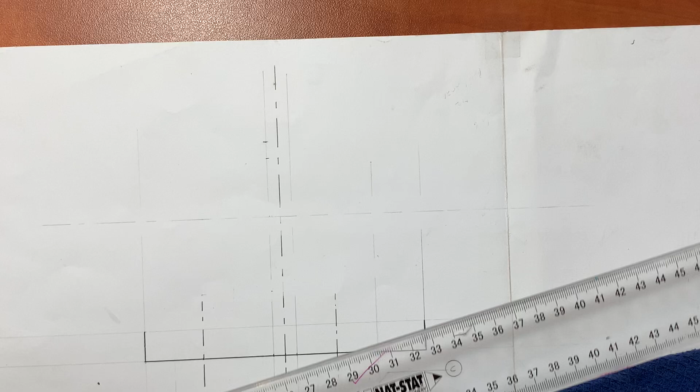Okay, so guys, I think I've double checked. This one is 87. So 87 is ending here. So I'm gonna have a horizontal center line that goes. So this one I'll have to, where is this one?

Okay, I'm actually having challenge with hard copies, but then the owner is insisting, saying please do it. Do it. No, it.

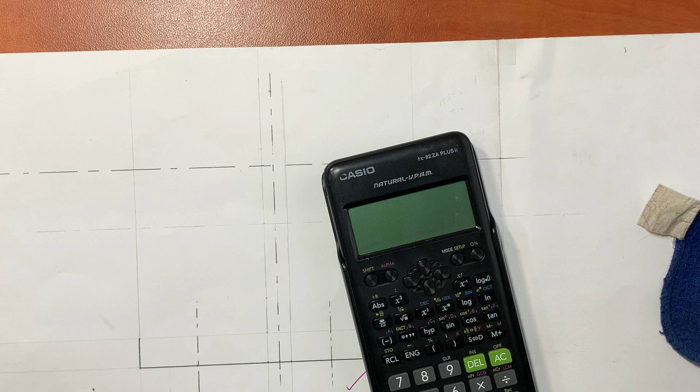Okay, then after that I can come and read the biggest dimension here. So the biggest dimension from here till here is how much? It is 78. We've calculated that. 78 divided by 2 is 39, isn't it? We did that. This is 39. This is it. Then now I just come and place it here, mark there and mark here. And then I can just have horizontal constructional line and another horizontal constructional line.

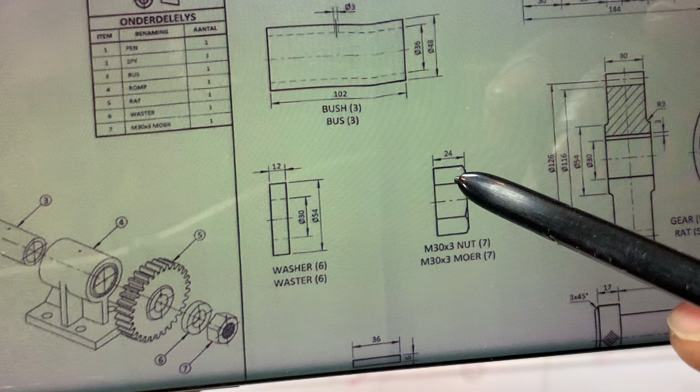Then from there, what can I have now? Okay, I can come and get this one. Let me double check what is going to be fitted there, because we have a diameter 3 there, which is going to correspond with that one. Just this diameter 3 corresponds with that one, isn't it? So what is going to be run there? Diameter, is it diameter? So there will be a pin fitted there. There's supposed to be a pin of diameter 3.

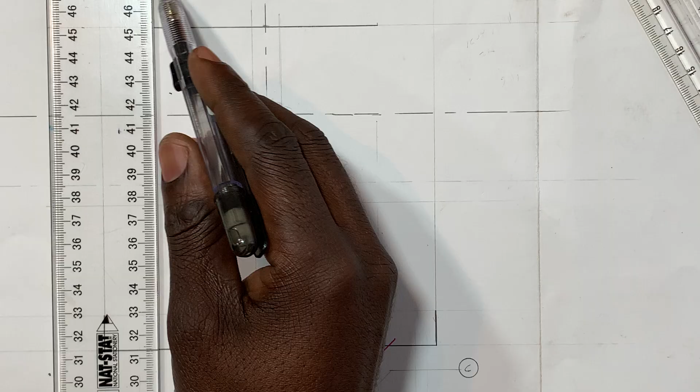Okay, so now what I can do is get this one, 96. So it's 96 divided by 2, which is 48. So I can come and just get the 48 this side. This is 49, 48. Which is 96, 96 to 0. This is it. Can then have a vertical constructional line and another vertical constructional line.

Okay, after that, I can actually see that it's gonna go with 3 millimeter out. 3 millimeter. So 0, 1, 2, 3. Even this side, 3 millimeter. 0, 1, 2, 3. From there, you can just have a constructional line down.

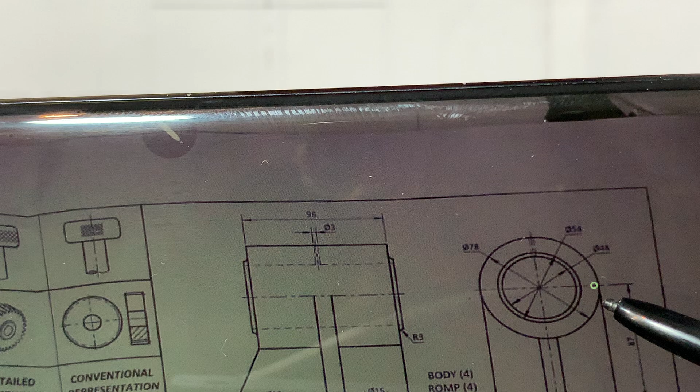Then after that I can come and get this diameter now. This diameter is going to be diameter what? Diameter 58. Yeah, 54. Is it diameter 54? That one is 78. And then the inner one is going to be diameter 48. So this is gonna be 54, which is this one. Check it nicely. 54, which is this one, isn't it? So 54 divided by 2 is 27.

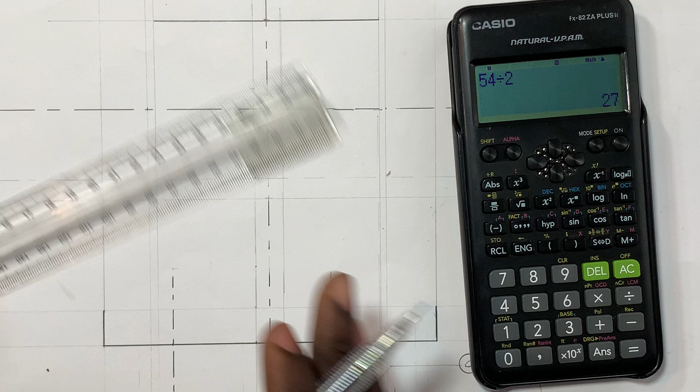So I can come and get the 27 both sides. 25, 26, 27, which is this one. 25, 26, 27, isn't it? Then I mark it 0 and mark it 54. This is 55, there is 54, isn't it? Then have a horizontal constructional line, and this horizontal constructional line will be like this. From here to right there, even this side.

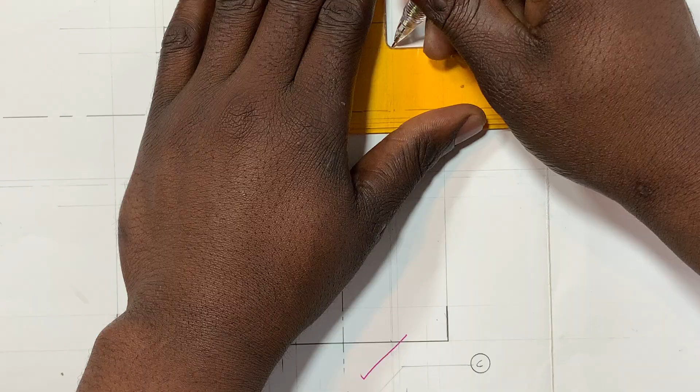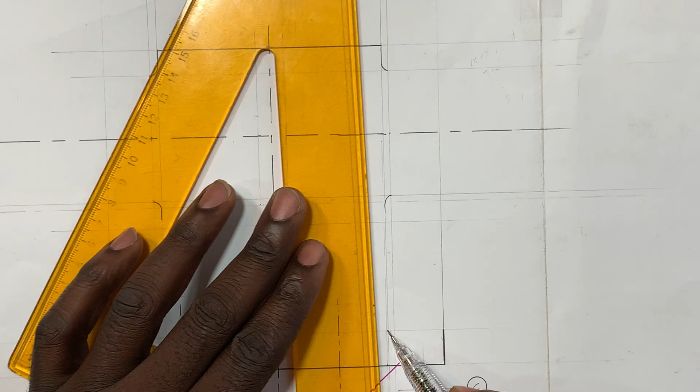From here to right there. Which is this one. Radius 3, which is something very small. So this side, from here till there, do the same thing. This side, this side. Okay, that's same. And then after I've done that, it's gonna go down till where? Till right here. Solid to right here. So solid to right there. Yeah, just a little bit for now.

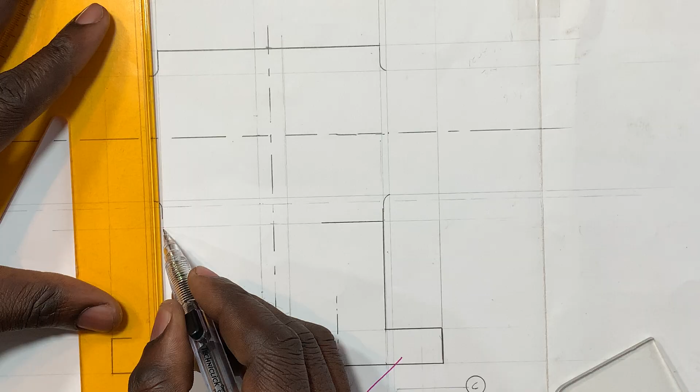So once it gets to the bigger diameter, which is the bigger diameter from here till right there, it is going to be just the horizontal. Repeat like this, and then from here it's gonna come down. So it's gonna just go down a bit, then from here to right there. Okay, that's same. Then it's going to be dark till the supporter, because from here till here is going to disappear.

You understand? So from here till the supporter, so that I can have this one solid. From here to there, here to there. You understand? So till such an extent, we are done with item 4, the body. So let's fit item 3 into item 4.

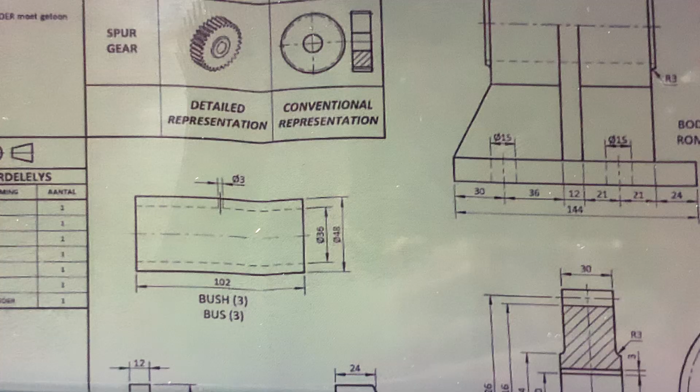So you look at the outside diameter. The outside diameter is diameter 48. So if I'm saying outside from here till here is 48, isn't it? So this 48 corresponds with this one, diameter 48, isn't it? So if you say 48 divided by 2, you are getting 24. So let's do it. 24. This is 25, I'm looking for 24. This is 24. I mark at 0 and mark at 48. This is 50, 49, 48 right here.

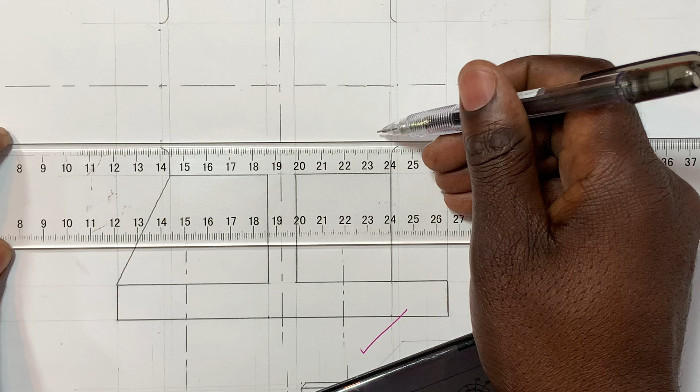And this one is going to be drawn firstly faint, and then from here till here solid. Then this one, draw it faint for now. You understand? So that you come and take a closer look to say what is going to happen there. There will be that hole of 3 millimeter, isn't it? So if you say 3 divided by 2, 1.5, 1.5, isn't it?

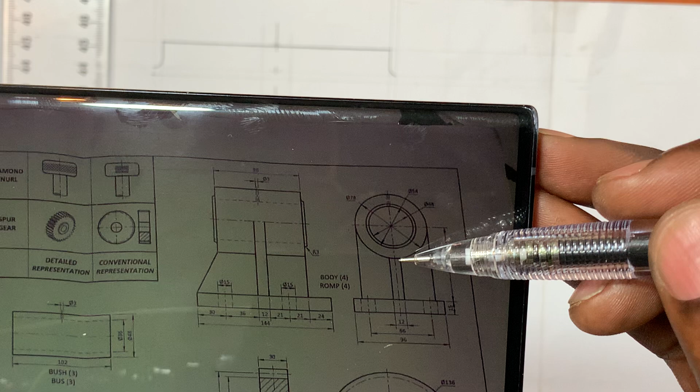So let's do it. 3 millimeter divided by 2. So 0, 1.5. So the 1.5 is between 2 and 0. Isn't it? So this is 4, this is 5, this is 4, this is 3. I mark at 3 and then I mark at 0. You understand? So then if we cut here, you can actually see that hole of diameter 3 is going to be cut as well, isn't it? So that is why what you see on your front view is going to be exposed.

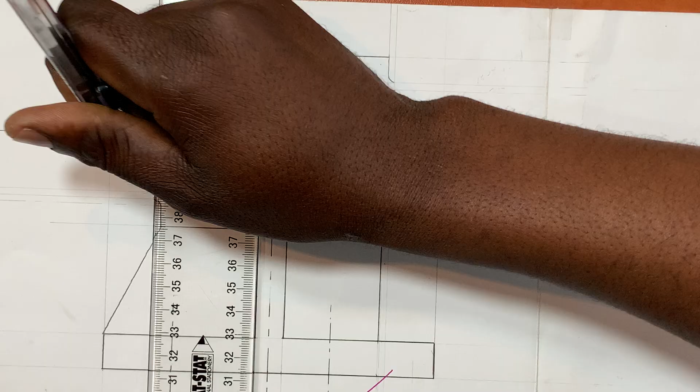So the hidden, those hidden, they will be dark. This one, they will be dark. Okay, so I've drawn this one solid, which means I can also draw this one dark like this, and these ones dark as well, from here till right there, from here till right there, solid. So I can just come and have this one dark here, and even here, dark.

Okay, so this is an internal part of my item 4, but I assume that the outer part of my item 3 is already fitted there. You understand? Which is diameter 48. So now the internal diameter of this bush is 36. Is it 36 or 35? It's 35 for sure. Let me correspond it with another one. 35. So what will be running through the bush is item 1, isn't it? So the outside diameter of item 1 is what? Is 36.

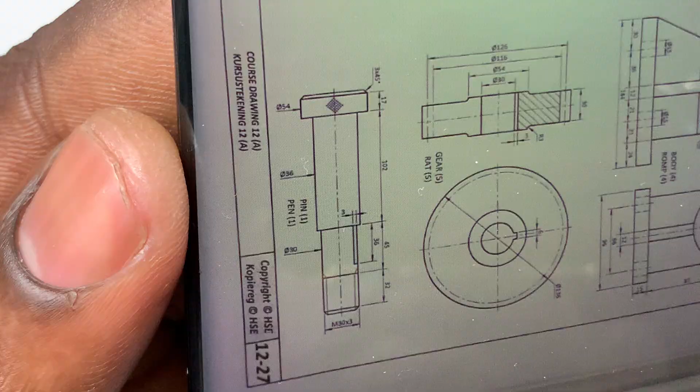And that one is what? This one is what? That is why I prefer hard copy. This one is 30. Diameter 30. So that one is 36. You can actually see it's diameter 36. So what will be running through the bush? This, isn't it? So it's 36. That confirms that this internal diameter that we're talking about is supposed to be 36. So 36 divided by 2 is 18 millimeter.

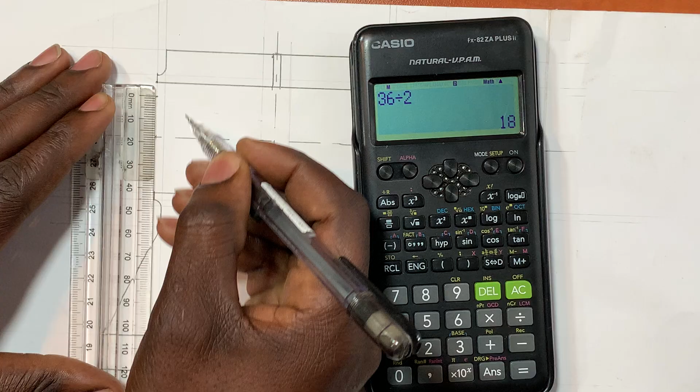18 millimeter. This is 19. This is 18. So I mark 18 and mark it 36, which is this one. Understand? So I can just have dark here and have dark right there. You understand? Then remember, the exploded isometric is always by your side. It's the one that is guiding you.

Okay. So we fitted that one. Which means this left part of it, we can close it. How? Can close right here. And close it right there. Okay, let me double check again before we close, because I can see this bush is actually of a different length. You can actually see that here. We have to erase it.

Let's double check. So from here till here is what, 90? No, wait, let me see this one. From here till here is 96 millimeter, and the bush is 102 millimeter. So you can actually see it's going to overlap just a little bit. So how? If you say 102 divided by 2, it's 51. So it's going to be 51 this side, 51 this other side.

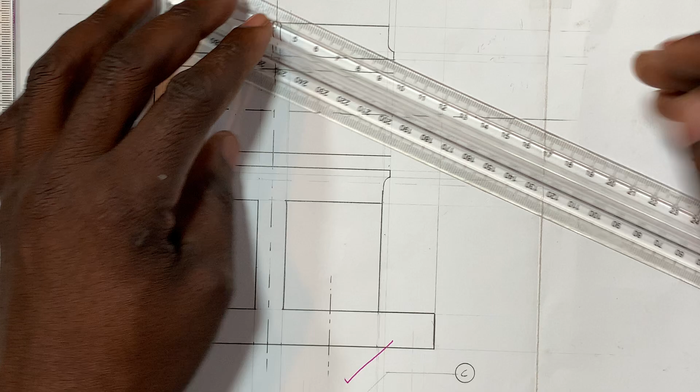Okay, so let's do it. 51. So this is 51. 100, 102. So it's actually correct. So we are on the right track. Which means I can close here as well, just a little bit, from here till there, from here till there.

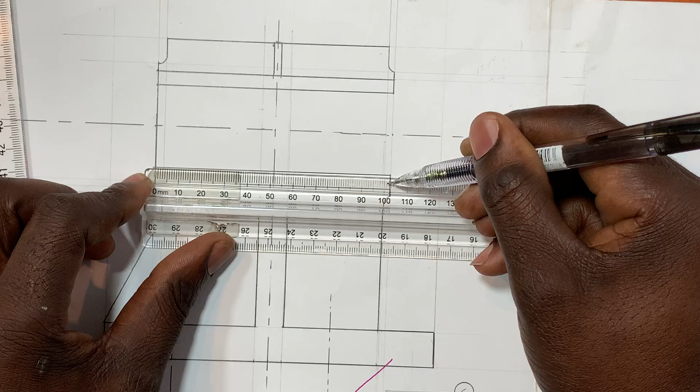106. No. 102. This is 110. This is 15. Let me double check again. This is 100 and 102. Yeah, it's correct. So it's going to be like this. So my item 4 is fitted already, which is this one. My item 3 fitted into item 4 already, which is that one, isn't it? Okay, but then here I have to erase from here, I just erase it.

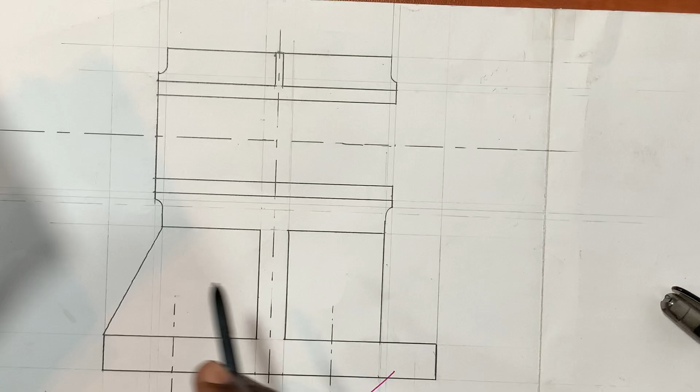Let me erase it now before I forget. Erase it here, my guy. Only here. Only. Okay. Then from there, we can fit what now? We fitted item 3. There is our item 4, fitted item 3 inside, fit item 1 inside already. So the moment I draw the head of it here, it means I'm fitting my item 1 already.

So this is it. The outside diameter of it is what? Is diameter 54. So 54 divided by 2, 27. Open my drawing compass to 27. Even if I don't use the drawing compass, because this is not a hexagon, it's just straight. Okay, so that's 27. It's going to be 27 this side, 27 this other side. 25, 26, 27.

This is it. I mark here, and 54. It's like we've dealt with this dimension, which is this one. I mark there. We've dealt with this dimension before. Okay, they said this is its diameter, isn't it? So it's of a height of what? Of 27 millimeter. I mean, not 27, 17 millimeter.

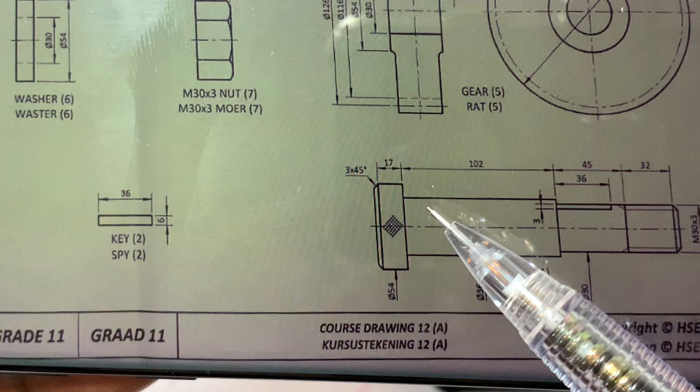My mind is tired. No? I had a long day.

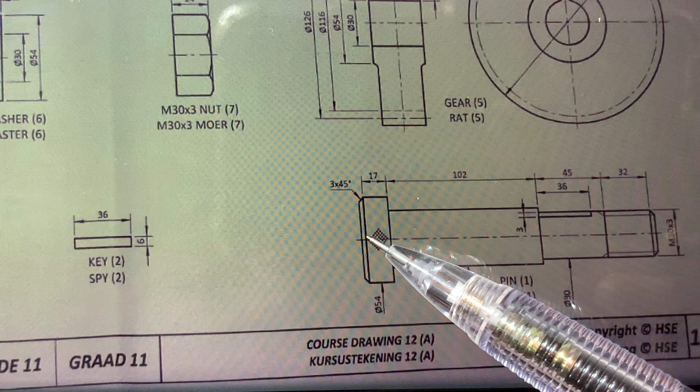Then they said if they are saying 3 times 45 degrees, which means from where your 17 ends to come here is 3 millimeter, and you can actually see it's just coming out by itself. Let me see. 0, 1, 2, 3. Just a little bit, very close. And remember, which line was this one? It's actually that one from the base. You understand? Then from there, it's very close.

Then from there, use 45 degrees. 45 degrees from here to that line. Then from here to that line. Then I can have this one solid till right there. So this is its head. Then after the head, we are going to have its length.

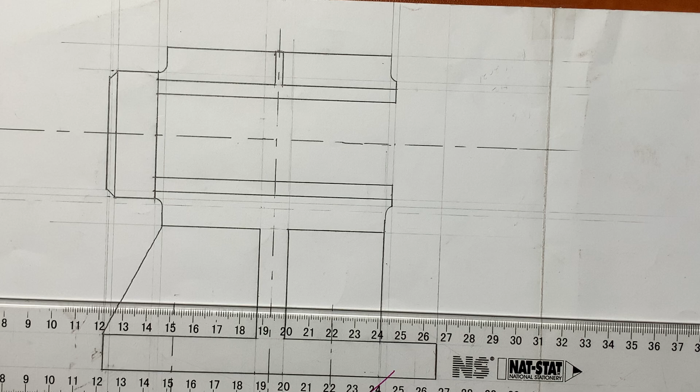The length, we are told again, my brother, that where you recorded 17, record 102 millimeter. This 102 millimeter actually corresponds with what? With this one. And remember that from here till here is that 102. So which means the moment I'm closing it like this, from here to right there, it's as good as if I am drawing this line that you can see from here till here.

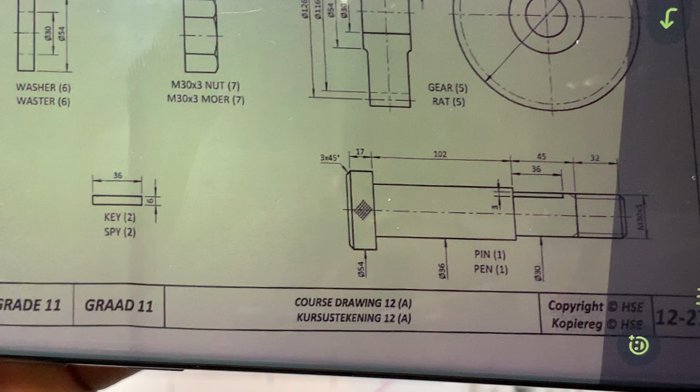Everyone, remember that this is going to be regarded as a shaft, and a shaft, we do not section a shaft, you draw it exactly the way as it is. Understand? And then after that you record 45 and 32 and 36. Let's start with the 45 followed by the 32. 45 from where your 102 ends, which is right here. 45 is ending right here.

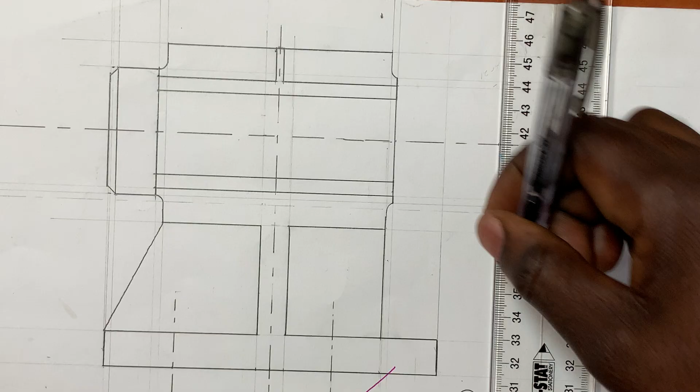Then remember, the exploded view is still by your side. It's the one that is telling you everything. After the 45, there is what? There is a 32 going horizontal. 32, which is right there. Okay, that's it. Then from there I can just have a construction line, another one vertical. Let me simply extend this center line. There it goes.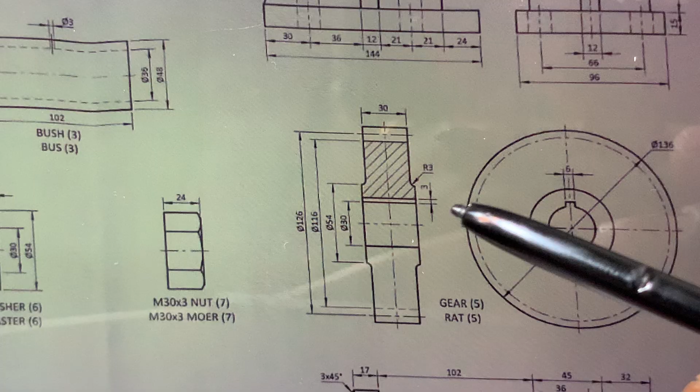Then after that, your exploded view will always be by your side. You can actually see that what is supposed to follow now is item 5. Where is your item 5? Item 5, which is the gear of a thickness of 30 millimeter. And remember, from here till here is 3 millimeter, so even this side from here till here is 3 millimeter. You understand? So it's supposed to be attached to your item 4. So I can fit it like this.

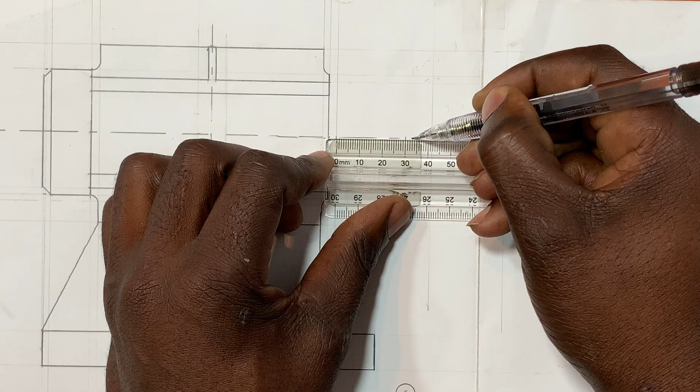Firstly with radius 3 from here till here, 0, 1, 2, 3, isn't it? Once it gets there, I can then record the 30. Which one was this? Let me erase it before it confuses me. I don't need it to be this long anymore. Okay, let's say my 3 is ending there. I can then record the thickness of it, which is 30 millimeter, isn't it? So the 30 is right here. After the 30, 1, 2, 3. Then from there it goes faint like this, then faint like that.

Okay, remember this one was the 45, isn't it? So our wheel is supposed to start from here till here. Let's get to the outside diameter. The outside diameter of it is 126, and remember we are using a scale of 1:1. 126 divided by 2 is 63. So I come in and record 63 this side and 63 this other side. 63, and 61, 2, 3, which is this one.

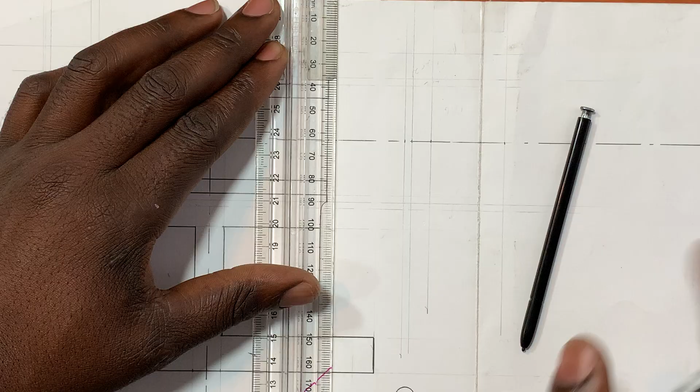Then 100 and this bottom part 126, 120, this 125, 126 is right here. Okay, that's right. And then from there, my 126 ending here on the upper part seems to be going out of my drawing sheet, but I've tried to adjust it. Remember, at the bottom of the drawing sheet I have another drawing, isn't it? So that is why it seems to be getting a little bit small.

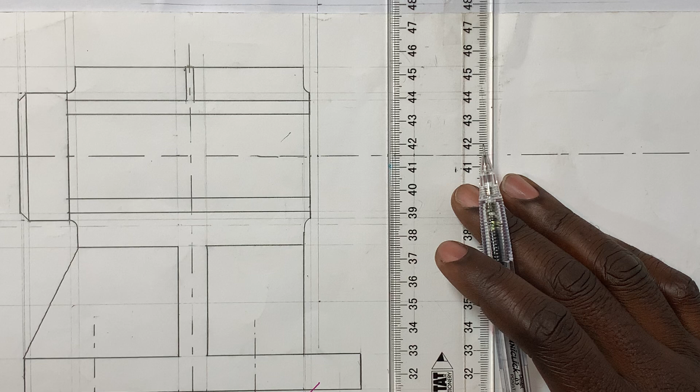Okay, so now after that I can have this one dark. It's where faint going up. That's where my 30 is ending, isn't it? So come and have this one dark from here till there, and from here till right there. So it's gonna go up, dark, just a little bit for now, since I don't know it's going to be dark till where. So even this side, it's going to come down just a little bit for now, since I don't know yet, up until I come and double check this diameter.

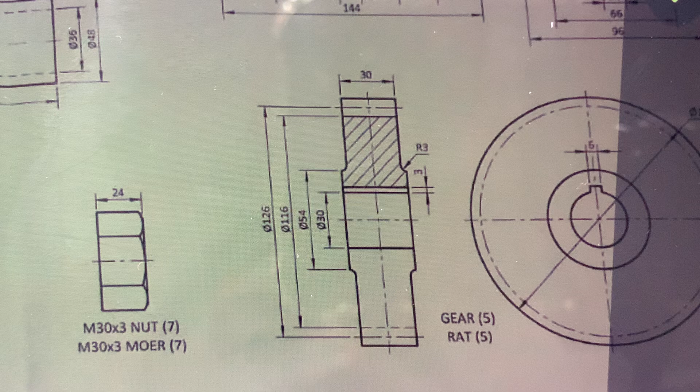Okay, so the 106, let me double check something. The diameter of 126 is actually giving us the PCD. The biggest one is 136. That is why I prefer to use a hard copy. But it's fine, still on the same thing. So we'll fix it.

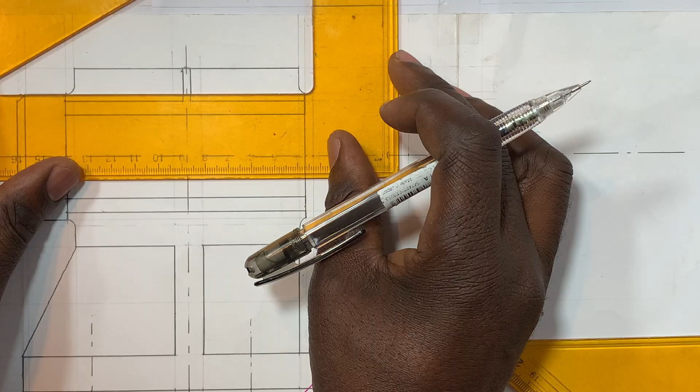Now let's get that one, which is 54. And the 54, I think we've correlated it, is this one from here till here. We've done it, so we know what it is going to be. This is the 54, if you still remember very well. So it's going to be dark till right there. So even from here till here is the 54, and it's going to be done like this. So what you've done this side, you can do it this side as well.

So I'm aligning this with that. So there it goes. Just a little bit. It's not clear. Just like this. What's happening? Oh, the paper that I've put under. So even this side. Where is it? There it goes, which is this one.

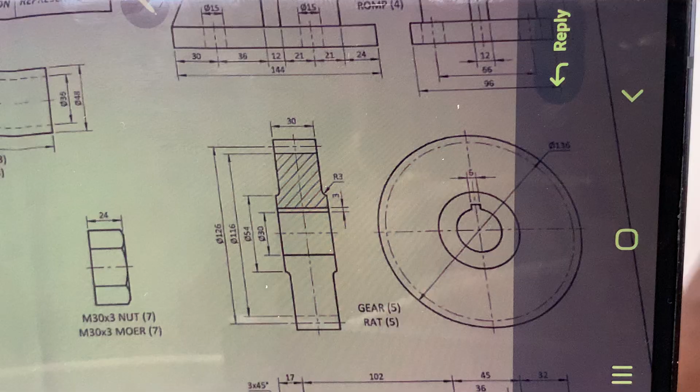Okay, so what I've drawn as a solid here is going to be hidden. It's giving you the PCD, pitch circle diameter. So this 126 is giving us the PCD 126. So the biggest is 136. I can actually see the 136.

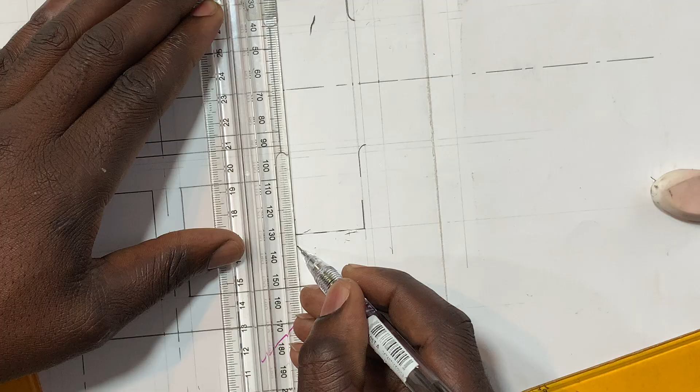So 136 divided by 2 is 68. 68, this is 70, 69, 68 is this one. This is my 68. I mark it 0, and mark it 136. I'm looking for 136, which is this one. So it's the one that is supposed to be dark, with that thickness of 30 millimeter.

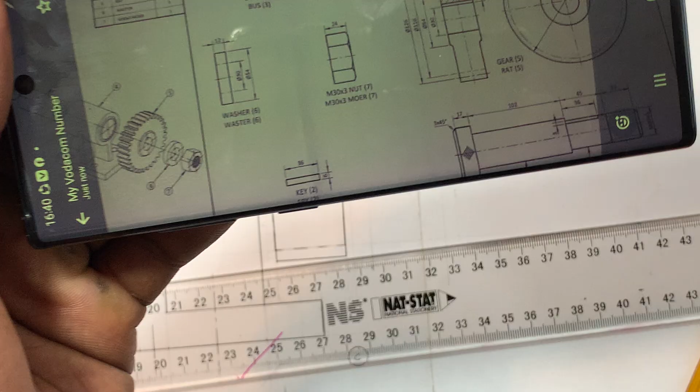So now I'm having a clear picture that from here till here it should be closed like this. So even here it should be closed like this. Are we together? So what you did here, you'll do it up here again. The thickness of 30 is this one, from here till right there. Then now I can join it solid till at that. Okay, that's it. So I can just go down a little bit for now, up until I come and double check what is happening here. Let's see the internal part of it.

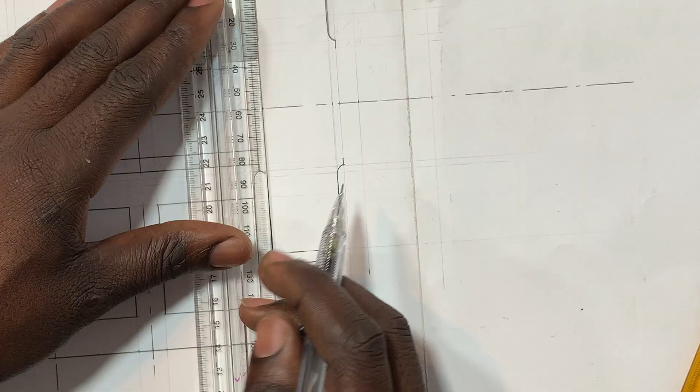Okay, so now let's correlate that 116. 116 divided by 2 is 58. So 58 this side and 58 this other side. 58, this is 60, 59, 58, you are here. So I simply mark it 0 and mark it 110, 115, 116, you are here. And it's going to be solid.

And double check, we are given the hint. This is the half sectional with the upper part in sectioning, according to sectional drawing. So the question said draw a full section, which means even the bottom part is supposed to be the same as this one. We're given it as half sectional, then I have to draw it full. Okay, that's it.

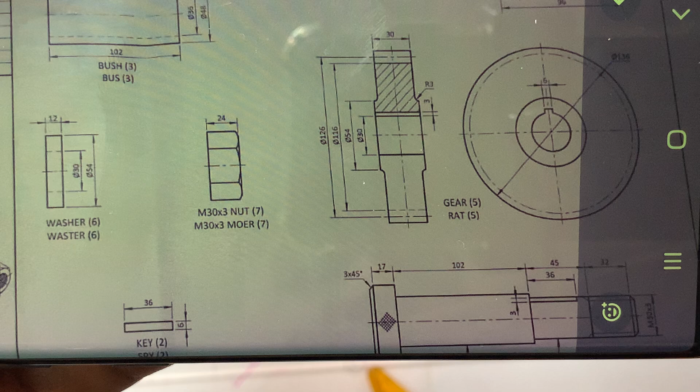Let's get to the 30. Simply mark 15 this side and 15 this other side. So 0 and 30. And I'm gonna have it dark from here till there. This one, let me not have it dark for now, because there is a key that's supposed to be fitted there. The key, which is item number 2, and let's double check. Where is it?

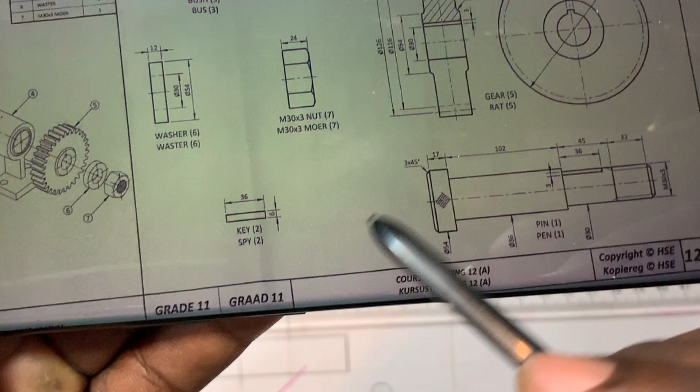36. So from here till here is 36, which corresponds with that one from here till here. Understand? So let me double check now. Let me firstly get this diameter 30, which is this one. Okay, we've gotten it. Then they said from here till here 3, which means from here 3 up and 3 down, so that we get the true 6 millimeter, isn't it?

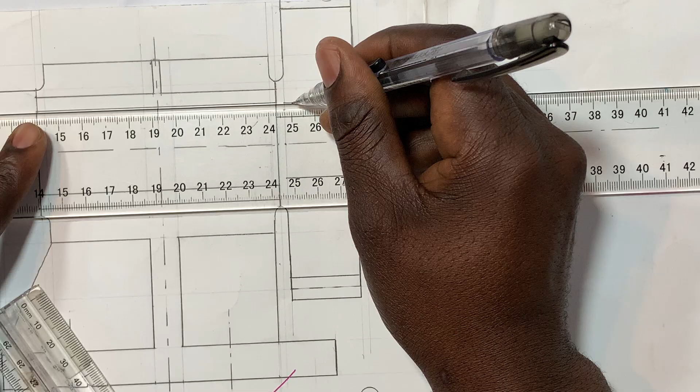So that's the key. Remember that from here till here 15, from here till here 15, so that from here till here is diameter 30. But then 0, 1, 2, 3, isn't it? Then I mark at 0 and I mark at 6. You understand? And this key of ours is going to be exposed as well, like this. I'm not quite sure about its height. Let's get it, because it's supposed to start exactly here.

Remember this part, you see where I'm pointing? This part where I'm pointing is which one? Is that one in our drawings? That one. So the 36 is starting exactly there. So let's get that 36. From here, 35, 36, which is actually exactly right there, my brother. So we were actually on the right track.

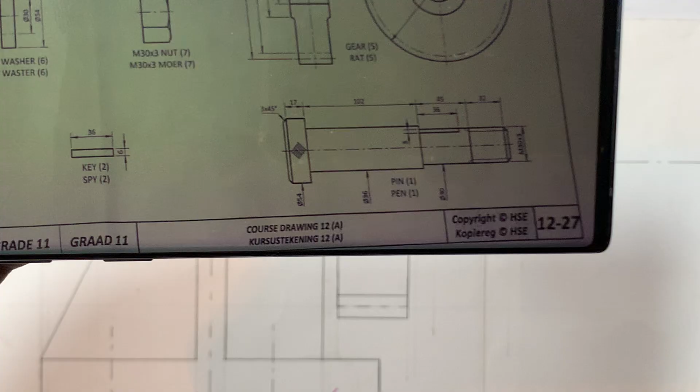Okay. But now what I can do, I'm gonna close it here and close it right here all together. So this one I have to just extend it a little bit till it gets here. Then after that, what is going to happen now? Double check that the 45 is actually ending here. Still remember, it's actually ending here, isn't it? Okay, so after the 45 there is a 32. Okay, we've dealt with it. There it is.

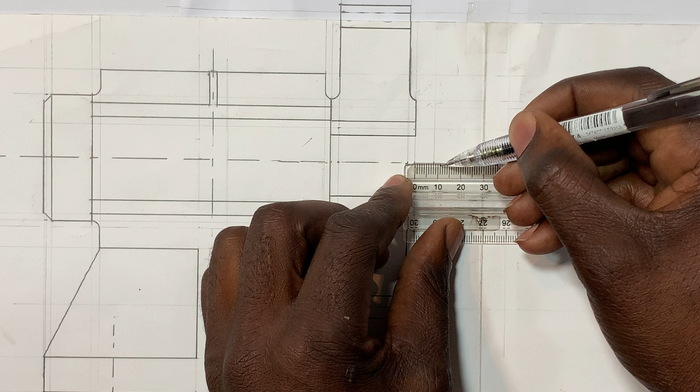Once we fitted the gear, which is item number 5, what's going to follow is the washer. So the washer is of a thickness of 12 millimeter. So it's still the inside diameter, which is that one. Okay, and then this washer, I am going to record the 12 millimeter now from here till right here. That's the thickness of the washer, isn't it?

So there it is. Then this one will be still continuing till right there. Then we come and say from here till here is the 12 millimeter. That's the thickness of that washer. I've never seen a washer with such a thickness. Okay, but that is it. That is its outside diameter. So the outside diameter is the 54, and the 54 is the dimension that we've been dealing with from here till here. So it will be just continuing from here to right there.

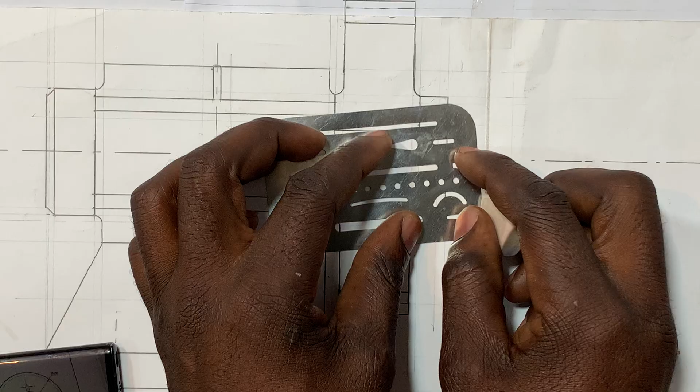Everyone, that's its thickness from here to there. But from here till here, it's not supposed to be. You raise it. Why are you spoiling your way? This one, you don't have to further extend it to such an extent, my brother. Just a little bit. Okay, let's say we fitted the washer.

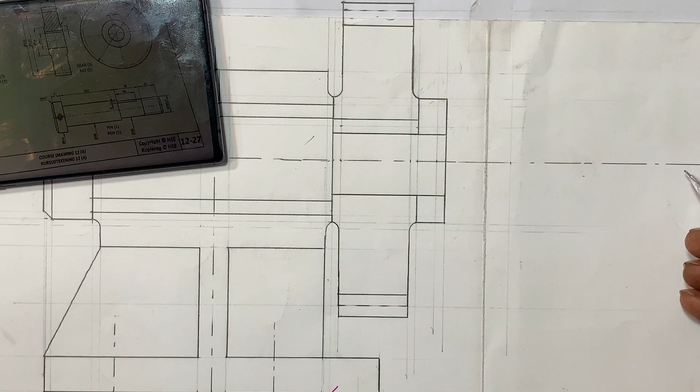Then after the washer, what is going to follow now? What's fitted there is the nut. Going to follow it with the nut now, which is going to be our very last item. So when it's like this, I can close here now. Close, yeah, right here. Okay, that's it. We will have to draw the auxiliary of this. And remember the question said we have to show the 3 faces, isn't it?

So now this nut of ours, to quickly draw the nut. So the nut is M30. Okay, we're gonna say 1.5 times 30, which is 45. 45 divided by 2 is 22.5, isn't it? So I simply open my drawing compass to 22.5. 22.5 is between 22 and 23, isn't it?

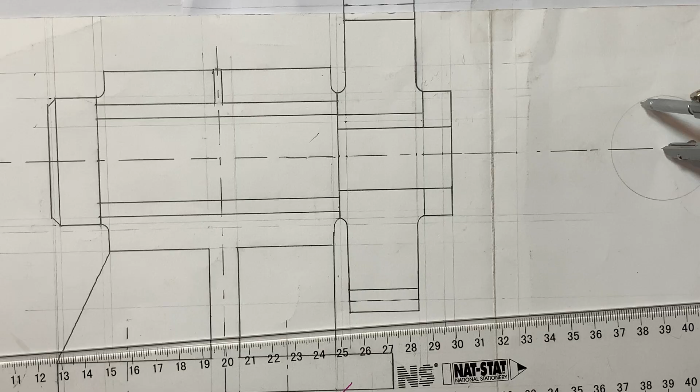Then just place it here. Then there it goes. Faint. Then after that, you can just draw the vertical center line, isn't it? Okay, it's okay now. Then from there I'll pretend as if I'm drawing across the flat hexagon. Use the vertical center line, place it here, strike an arc here, strike an arc here, place it here, strike an arc here, strike an arc there. I'm trying to be fast. Then from there, they said it's supposed to show 3 faces. There it goes.

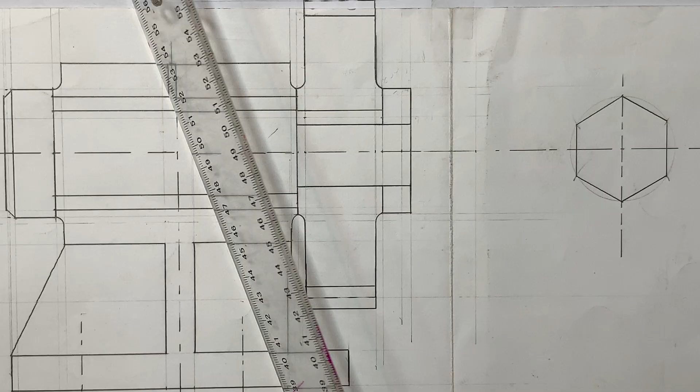There it goes. There you go. And from there, can just take it horizontally. There it goes. Stop there by the center washer. There it goes.

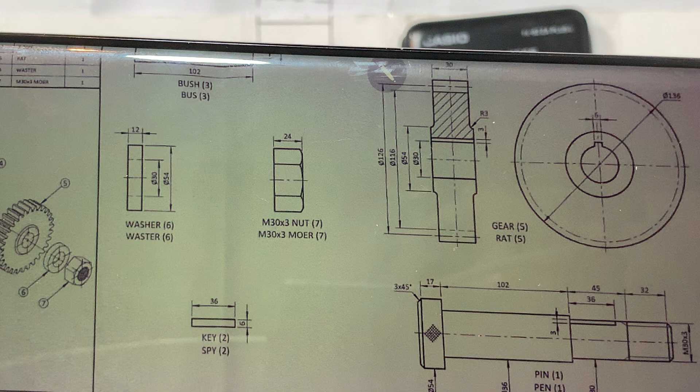So I come and double check the height of it. The height of it was given. So the height of it is 24, but we know that from the standard formula, the height of the nut is 0.8. So should you not be given the height of it, you must then say 0.8 times the M number, which is the height of the nut. In this case, the M number is 30, so 0.8 times 30. So you can see that should you still use the formula, you still get 24 millimeters. Understand? So that's how you use the formulas.

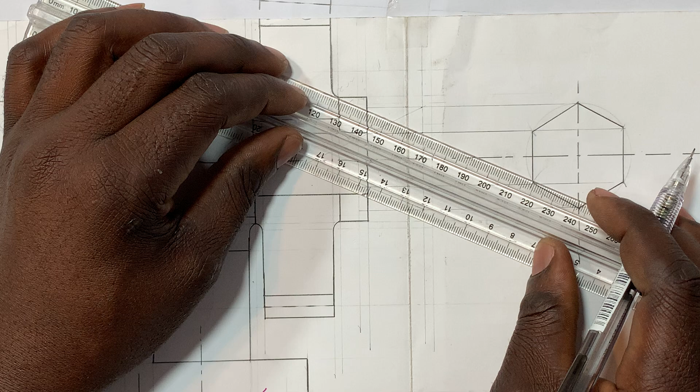So it's still 24. So the 24, I'll record it from where my washer is ending. 24 is ending right here. So I'm having the corner there, then that one till here. So now I join this corner diagonal, this one with that one. I further extend it up until it crosses my horizontal center line. Join this one with that again. So I join this one with that one.

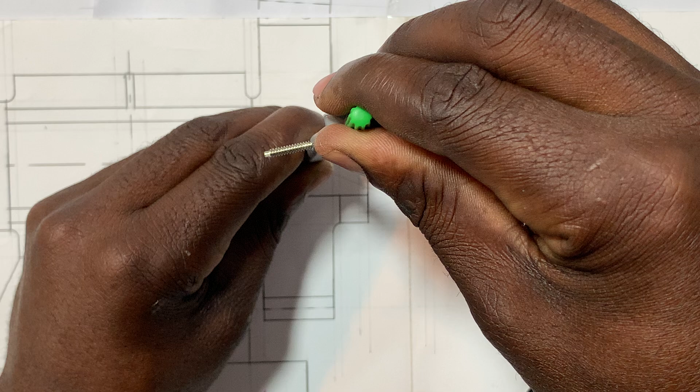So now I can simply take my drawing compass, place it where these two lines are crossing each other. Further extend it to the true height of my nut, which is this one. So I strike an arc till here. Right, so you mustn't pass here. Now I'll come and place it here. Close it. Place it right here. Further extend it to the height of my nut. So it's arc from here to right there. So even this side, from here to right there.

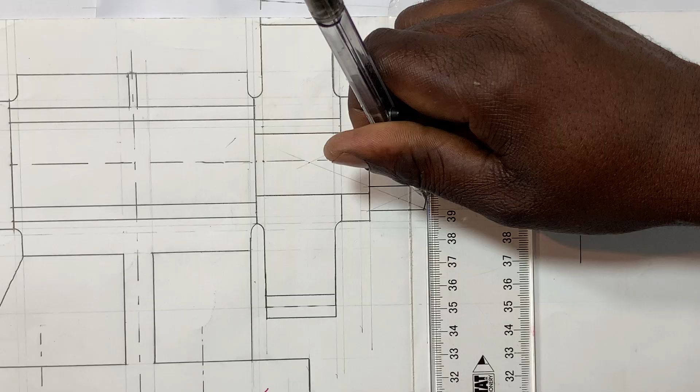You understand? So now I can come and have this one dark here. This is the bend of the drawing sheet, which is actually disturbing me now. So there it goes. Come and have this one from here to right there. Okay, that's it.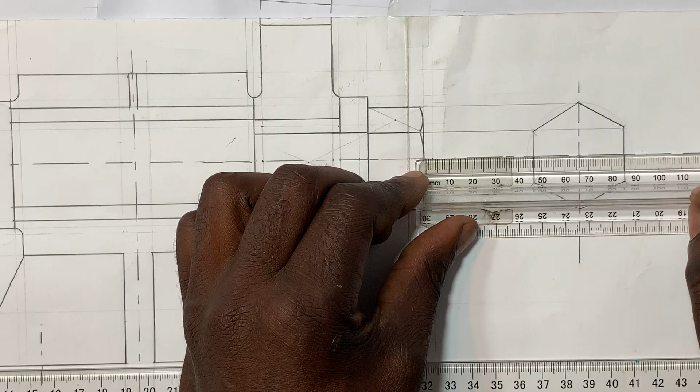And remember that your very last 30, the true height of the shaft, is ending where your 32 is ending. It's actually ending right here. So now, this is M30, isn't it? I'm going to say 0.1 times 30, which is 3 millimeters. So where my thread, the true length of my shaft, is ending, I'm going to record 3mm going back. This is 5, this is 4, this is 3, which is actually on top of this line of ours. Then from there, I'll just have a 45-degree line like this, and another one like this.

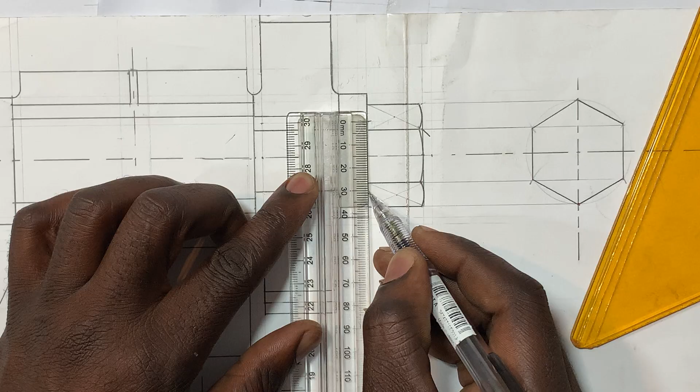Let me double check before I spoil my work. It's 30, isn't it? Yes, it's 30. Where is my 30? Remember, there is a shaft. So the 30 is actually ending there; that's the constructional line of it. So what I was about to draw here was actually out of order, because the nut is not going to be cut. So it's better you rely on the dimension. This is half of 30, which is 15. So I mark at 0 and mark at 30. These are the constructional lines I'm supposed to be dealing with. The 30 is right here, isn't it? So what you were about to do here was already going out of order, so erase it.

What you're doing here is supposed to be done, because from here till here this shaft is going to be in hidden. From here till here this shaft is going to be in hidden. What I was about to do here is supposed to be done there. So do it from here to right there. So even this side, from here to right there.

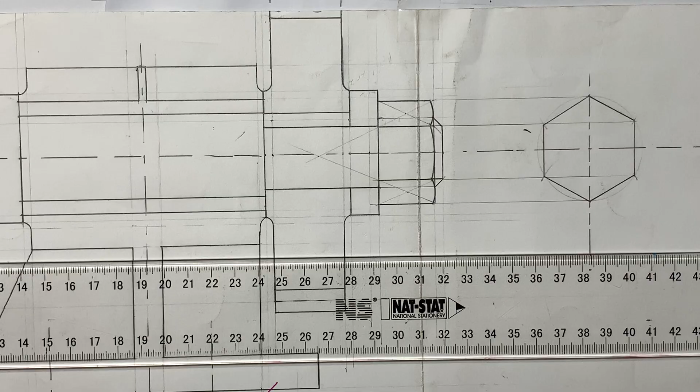Then it's going to appear just a little bit small, like that. So that's how it's supposed to be. And then going back. So that is it. And then from there we can start to section our work. Let's section our work then.

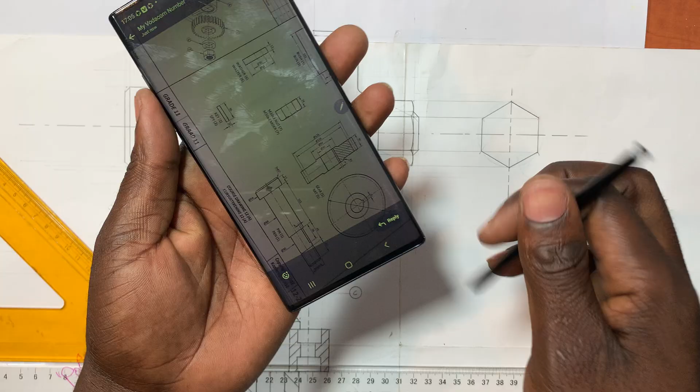Okay, let's section. So the bigger the item is, the huger the hatches. So I'll start with the bigger one. I'll decide to start right here. There it goes. Because if we cut here, let me explain it. Because if we cut here, if we cut this right view of ours, from here till here, it will disappear.

This one will disappear. From here till here, it will disappear again. And then these holes, do you see that we've got holes of diameter 15, which we didn't speak about? Though they won't be cut, they will be separated. Understand? So that is why we are having the centers. These centers symbolize that at the back of this there is a hole.

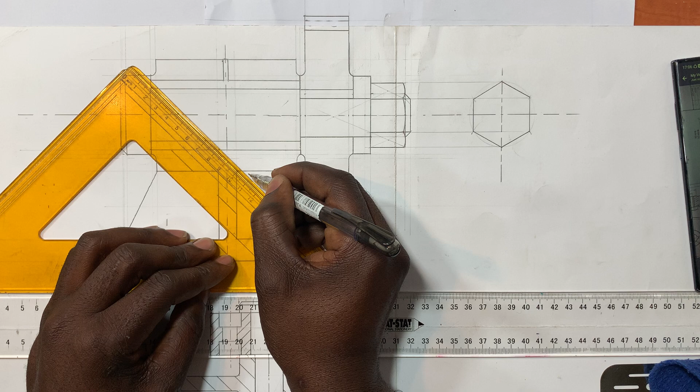Understand? So let's continue. So I have this, I have that, I have here, that goes, that goes, have here. So from here till here, it's another item, such that you don't have to section it. Your hatches must change direction when they get there. So there it goes.

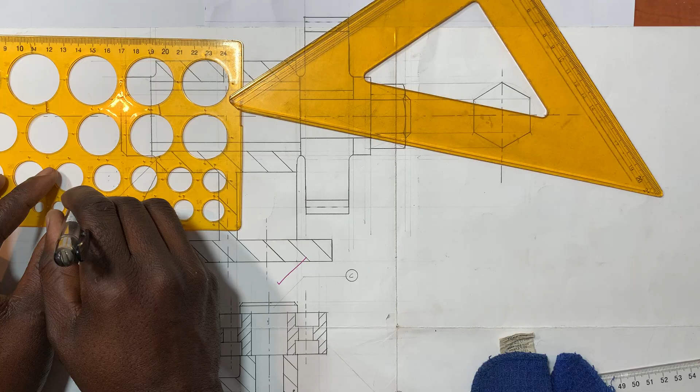I have this one here. So it's another one. Still item 4 there, still item 4. You understand? So I can dimension it like this. This is what this is. Item 4, as much as I still remember, which is the bolt.

So followed by the one that is big, item 5. Are we together? Item 5. Remember, we were given the hint of item 5. How is it going to be in sectioning? Understand? So here till there. It goes. It's already coming out up there.

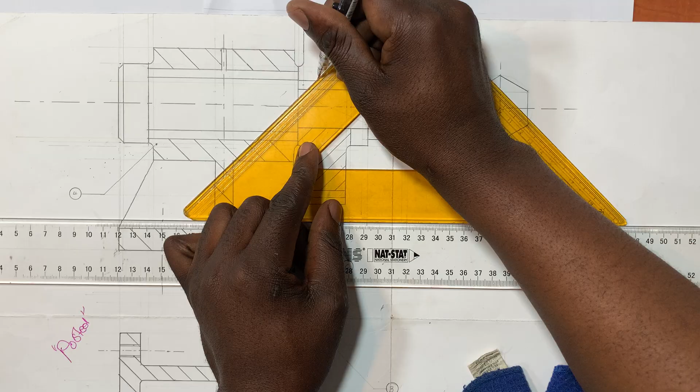There it is. Then what is this one? I can dimension it like this. This is number 4. Then followed by which one? Followed by the bush. Remember that these ones were clockwise, this one was anti-clockwise, then this one is supposed to be, that goes. It's already coming there. Remember, this is the center.

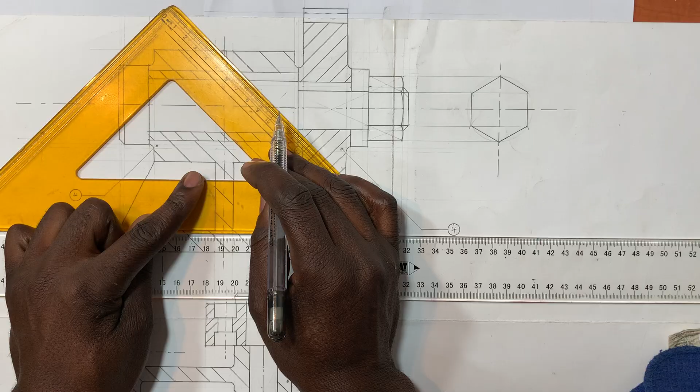Then here, what is happening? I must ask myself what is happening here, because the hatches cannot just end. As far as I'm concerned, right at the beginning it is supposed to be closed like this. So you close it, because the hatch line is supposed to go from a solid line to a solid line. You understand? It's no longer there down here. Okay, that's it.

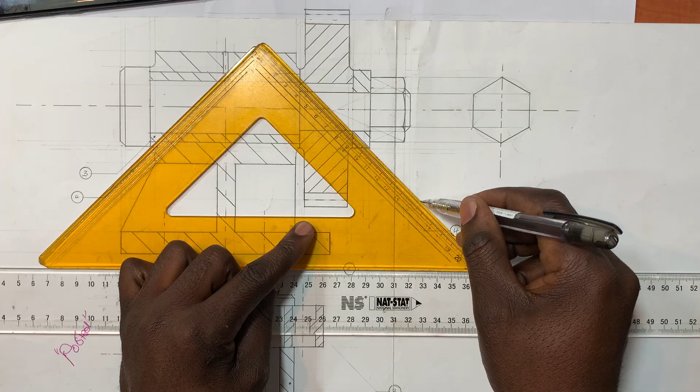Then this one is going to be item 3, which is the bush. Then after item 3, what else is going to be in sectioning? Item 6, which is the washer. So it's supposed to be anti-clockwise. There it goes. So you are item 6.

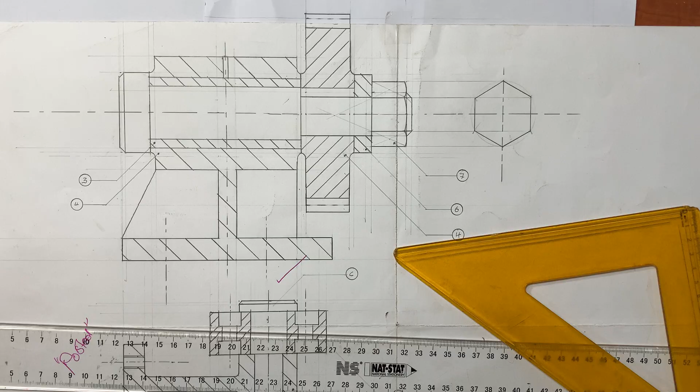Then the nut, item 7, is not going to be in sectioning. Item number 7. So remember, we are having 1 up to 7. So where is item 1? Where is item 2? Item 1 is the spindle, the shaft? It's the pin, which is the big one, isn't it? This one, which is item 1. Item 1, we are here.

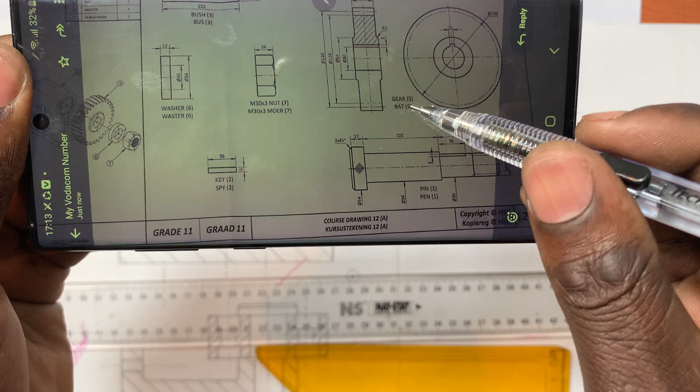Item 2, the key, is not going to be in sectioning as well, but it's supposed to be labeled. Which is item number 2. So I have 1, 2, 3, 4, 4. How come I'm having 2 of item 4? This is item 5, my brother, not 4, because they didn't say item 4 is supposed to be drawn twice. So I'm having 1, 2, 3, 4, 5, 6, 7. That is it.

I think there was a pin that they were supposed to put in as item 8, a pin of diameter 3. Okay, that was it. But remember, on this space you have to print the part list. Okay, that was it, my guy. I think I've answered your question. Okay.